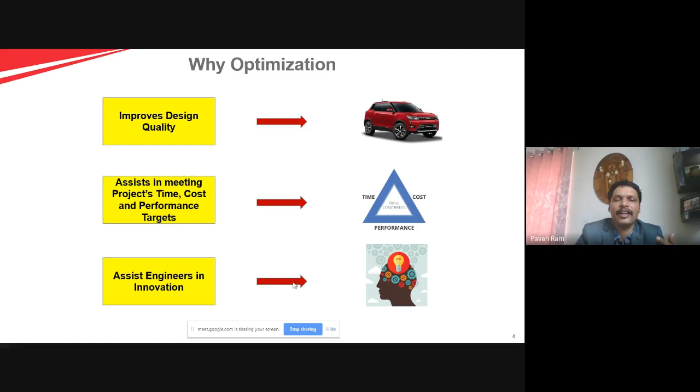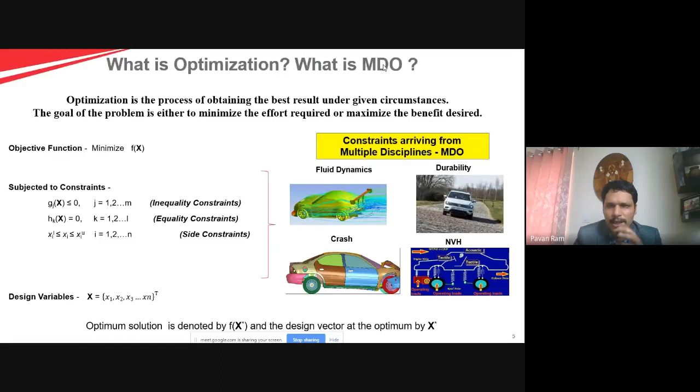They understand, they do some trade-offs, conflict resolution, and then they formulate the problem in a very systematic, mathematical way, so that your optimized mass is good for all the requirements. So MDO, because multiple disciplines are involved in the constraints. Okay. Now we know what the problem is, what MDO is and why MDO is required, right? Now let us look at it.

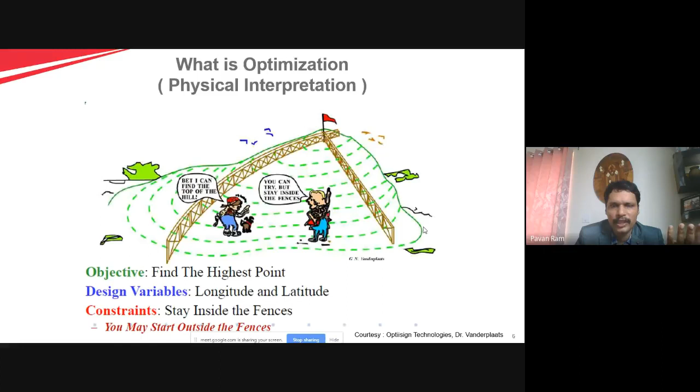Here the constraints are fences. So what I'm trying to say is, in an automotive engineering problem, these fences are nothing but the constraint equations coming from various requirements. So this is a simple physical interpretation. Now, let us give 2 minutes on the trade-offs an automotive engineer typically has to make.

can you see my cursor? All of you are able to see my cursor? Yes, sir. Great.

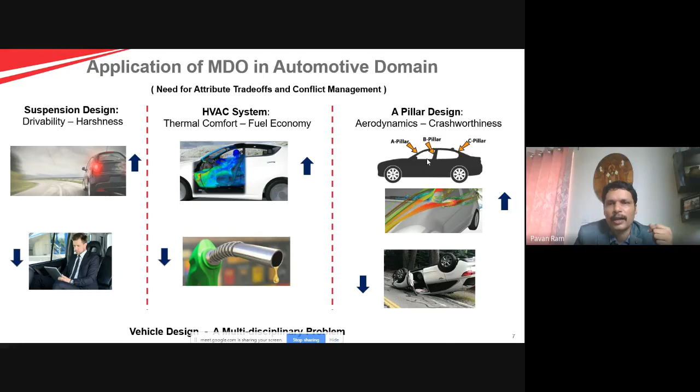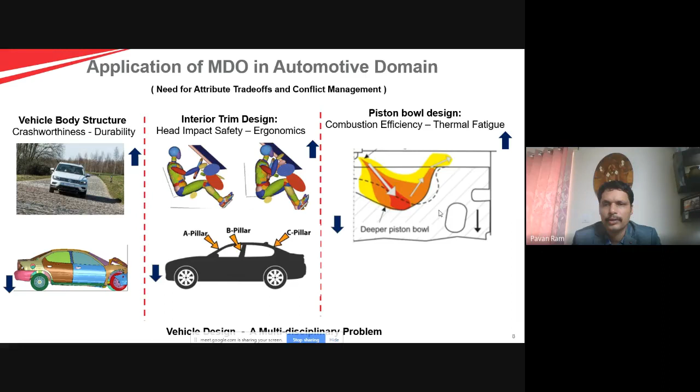Okay. So now we understood what is optimization, why optimization, and what are the typical trade-offs in automotive engineering. This list of trade-offs can go to more than 50, 60 in a typical automotive problem. What are the key challenges in applying MDO? First of all, how to formulate the problem. It requires people from multiple domains. And then how to run various codes, HyperMesh, ANSYS, LS-DYNA, because it requires expertise, and each code is good in one phenomenon. Abaqus is good in contact, LS-DYNA is good in crash, Adams is good in vehicle dynamics. So how do you get experts in different softwares to come together and start working on this?

And then let's say you have the experts, you have the problem definition in place. At the end, when the results come, how do you interpret the results and ensure that your manufacturing cost and scalability aspects are taken care of and your recommendations are going into the product? Different levels of expertise are required. And once you get this expertise in place, MDO should not be a challenge, right?

Of course, the benefits of MDO I already explained. Quickly, MDO can manage complex problems. It can handle multidisciplinary problems. And then we need to come up with a single solver which can do optimization, because there are a lot of solvers doing multiple things. Can we come up with a single solver which will help to deal with all the disciplines? And then there will be a drastic reduction in computational time and cost if you get into MDO mode.

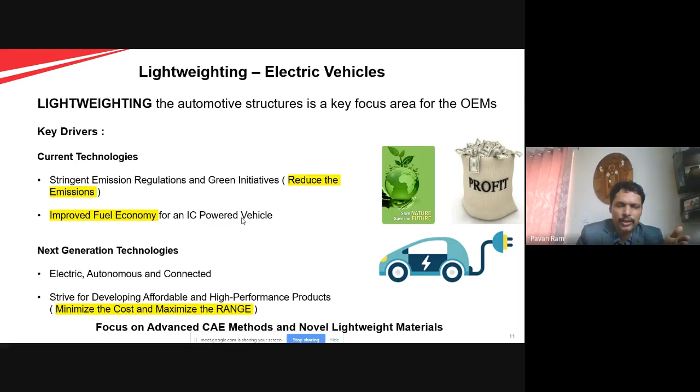So now let us get into some specifics of EV and IC engine powered vehicles. You all know why we are talking about EV. Obviously, if you reduce the weight of the structure, it will translate into either range improvement or fuel economy improvement. So I'll not stress on this slide. Okay. So now when you try to do lightweighting, there are various ways one can do lightweighting.

One can focus on the material, one can focus on the joining techniques, one can downsize the engine, improve the efficiency and downsize the engine so that your overall weight of the engine will come down and your vehicle performance will improve. Or you can work on structure, doing the structural optimization like wall thickness, shape change, topometric, size optimization, right? Multiple options are there. In this example, I'll be talking about gauge optimization, thickness optimization.

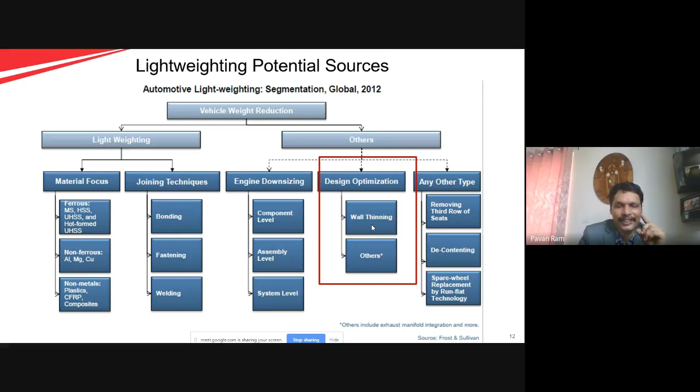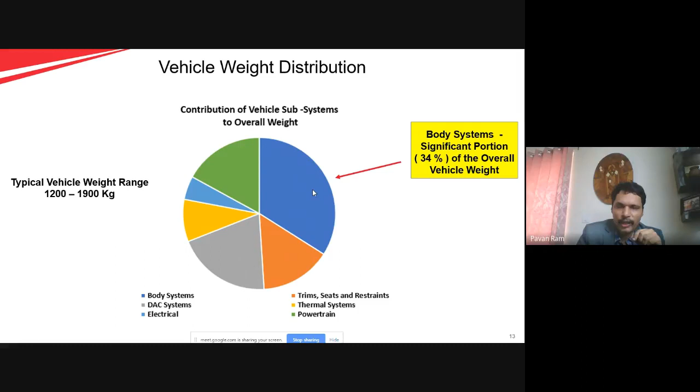Now coming to an overall vehicle, what is the low hanging fruit? So this is a typical distribution of weight, right? Trims, seats and restraints, this is the weight. If you see, the majority of the weight is coming from body systems. 34% is from BIW structure, either monocoque or body on frame. So present work deals with the body in white structure. So if you see the body in white structure, right?

Next 2-3 minutes, I'll try to explain how to formulate an optimization problem in a passenger car. Okay. Again, there is an objective function, there are thicknesses, right? And there are constraints. And these constraints are coming from NVH, durability, and crash. Right? I don't want to get into details.

I'm not sure whether we have time. Acha, anybody can tell how much time is left for me? Sir, till 12:45, sir. Okay, good.

So let me just get into the details. So in this particular example, I took 3 thicknesses as the design variables, right? Thickness of the bumper beam, left rail, and shotgun. In a real world problem, the number of thicknesses will be huge, 40-50 thicknesses, which we'll be seeing in my next use case presentation. Right? So in this case, there are 3 thicknesses. And in a real world problem, you can have more than 40-50 constraints coming from NVH, durability, crash, vehicle dynamics, ergonomics, and so forth, cost constraints. Here I am showing only 3 constraints for your understanding.

One constraint, natural frequency greater than 15 hertz, right? This may be an idle engine frequency. You don't want the structure to respond to an engine when you are in a traffic signal. When you are in idling condition, your idling RPM, the rotating imbalance should not excite your structure. So one can be that. Your damage fatigue life can be more than 1.2, right? There are structures like the engine mounting structures, the rails, where hot spots are there. So your fatigue life should be greater than 1.2.

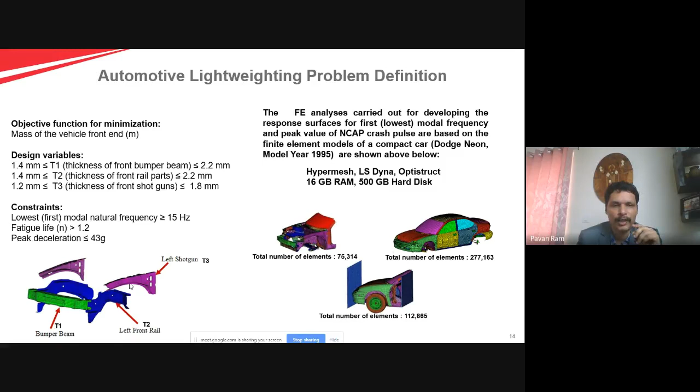Peak deceleration coming on the occupant should be less than 43 G. What it essentially means is that there are a lot of studies which say if your peak deceleration, chest deceleration, is less than 43 G, then your injury levels are less. These are some of the constraints. And if you see, there are 3 different models used for this. One is for NVH, one is for durability, and one is for crash. There are 3 different finite element models used. And your objective is to minimize the weight. Right.

Now, quickly, I'll go through 4 different approaches, how the MDO is evolving. Right? The first, the very basic approach is RSM-based method, where you generate the DOE, you generate the responses, you develop transfer functions, and use those transfer functions in an optimization problem and solve the optimization problem. That is the response surface method. The second one, which myself and Professor Anindya Deb from IISc have developed, a practical MDO, which results in a huge saving in terms of time to do the analysis, which I'll be explaining. And then there is something called hybrid MDO and then machine learning based MDO. Let us quickly see all these 4 methods.

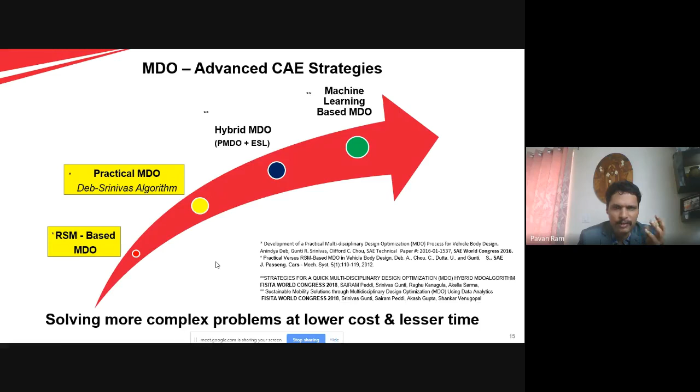So this is not your optimum solution of reduced weight, because you have a plane which is saying that your feasible region is only above this. So this will not be your optimum. There will be an optimum mathematically somewhere here, right? This is a typical response surface. And you can have an n-dimensional vector response surface. Here I am showing a three-dimensional one. It can be n-dimensional in the real world.

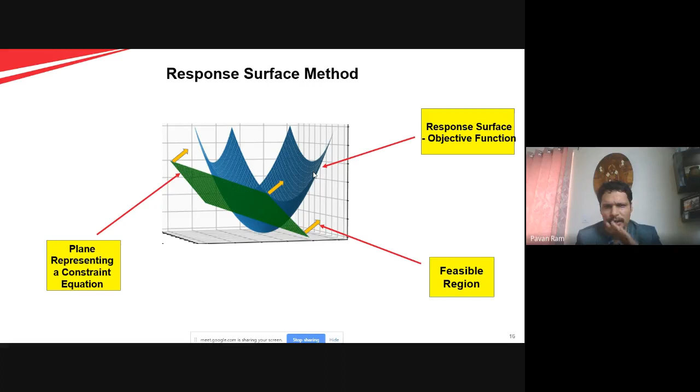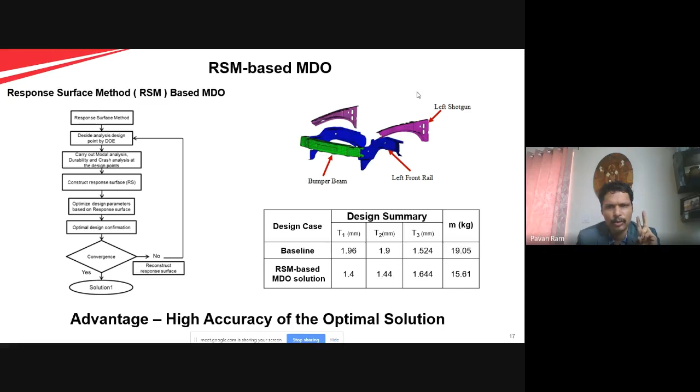Right? So what will be done in the RSM-based method? You have a DOE, you generate the responses, you build the transfer functions, and you plug that into your optimization problem, and then run the analysis, and you'll get a reduced mass solution. So here you got 15 kg, right? From 19 kg, you reduce it to 15 kg. Remember, this mass is only for these three components. In the real world, you will have many components.

Now, let me talk about the second one, practical MDO. So all of you now know RSM MDO. Now we are talking about a practical MDO. In practical MDO, what happens is you will try to reduce the number of runs which are required to do crash analysis. Why do you try to do that? When you're solving an MDO problem with durability, NVH, vehicle dynamics, and crash, NVH runs in a linear domain, so you will quickly get the result for whatever DOE you have set.

Durability, again, if you are within the yield limit, right, then again it's an elastic problem. Then again the time required is very less for solving durability verification plans. But crash involves material nonlinearity, geometric nonlinearity, right? And then contact nonlinearity. So when these three nonlinearities are there, and you're trying to solve at vehicle level, each run will take many days, right?

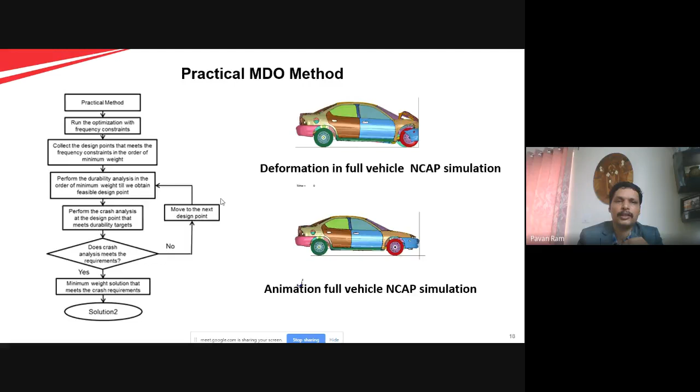So along with my professor Kalyanmoy Deb, what we thought is, why can't we design a method which will reduce the number of crash analyses, so that you get a substantial reduction in time, at the same time meeting the accuracy. So here you go. First, do NVH, apply NVH constraints, and chalk out those which meet NVH constraints in the order of minimum mass. Then you run the durability runs, and whichever meet the factor of safety requirements, you sort in order of minimum mass. Then you start doing crash analysis from the point where it meets both NVH and durability.

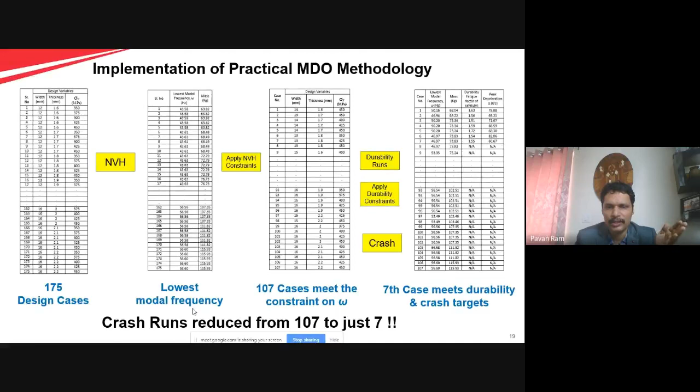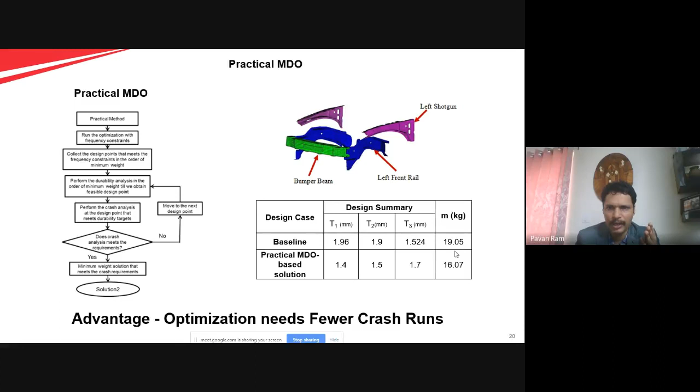So essentially, in this method, earlier you had to do 107 crash runs. Now you do only 7 crash runs, and you got the optimum solution. You got a reduction in mass in practical MDO, 19 kg to 16 kg, right? And if you see the time taken, the RSM-based method takes 62 hours to solve the problem, and practical MDO takes 14 hours.

Now, you can imagine, this method can be applied at vehicle level. What was applied here is vehicle level, but the design variables are only 3: shotgun, rail, and all. With the same method applied to the vehicle, we can include many design variables, and this time reduction will be constant. It's 1/4 computational time. Same accuracy at 1/4 of the computational time. So 4 days reduce to 1 day.

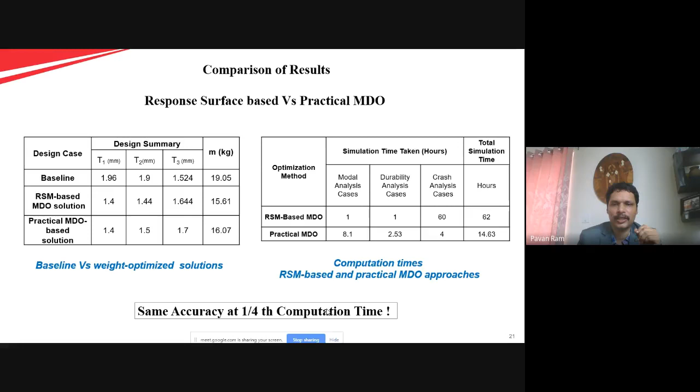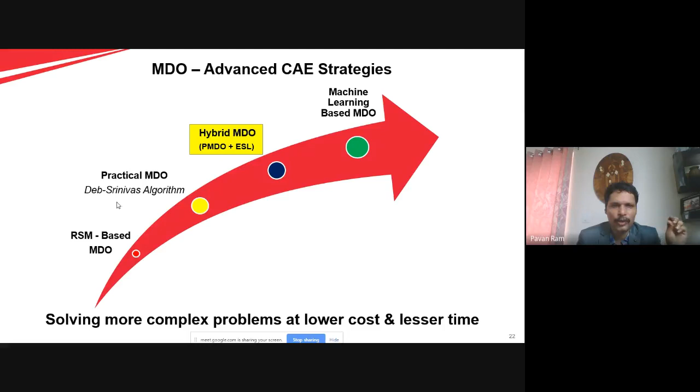Now quickly I'll go through the next method, hybrid MDO. Hybrid MDO is a combination of practical MDO and the equivalent static load method, where one of my students, Mr. Sairam Peddi, who is doing a PhD at IIT Madras, is driving this equivalent static load method in combination with what we have done in practical MDO. So in a hybrid MDO, even for the nonlinear crash runs, you can convert a nonlinear domain to a linear domain, do the optimization in the linear domain,

and then gain in the time required. I know it is very difficult for all of you to realize this in the short time; I cannot do justice to this method. You can pick up on this pointer and get into details when you get time. So hybrid MDO is a combination of practical MDO and the equivalent static load method. The equivalent static load method converts a nonlinear domain problem to a linear problem, does the optimization using the Genesis algorithm, and then maps back to your original problem. This gave a 1/8 computational time reduction. It's a huge benefit.

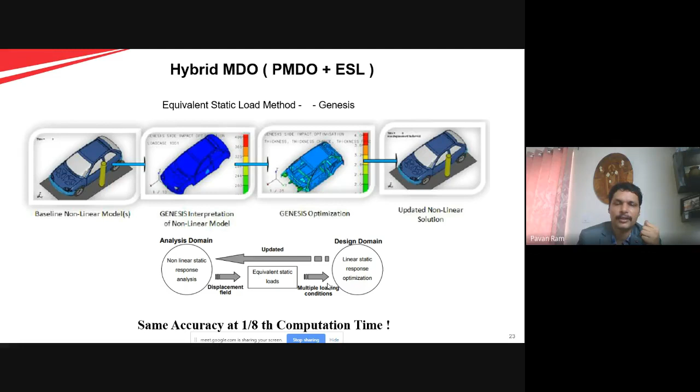And now what I'm talking about, a very important aspect, is machine learning based MDO. All of you will be surprised why AI, data science, and all these advanced machine learning based methods should be in the curriculum for automotive mechanical engineers, right? How is this relevant? You will realize after this example. So let me quickly go to machine learning based MDO.

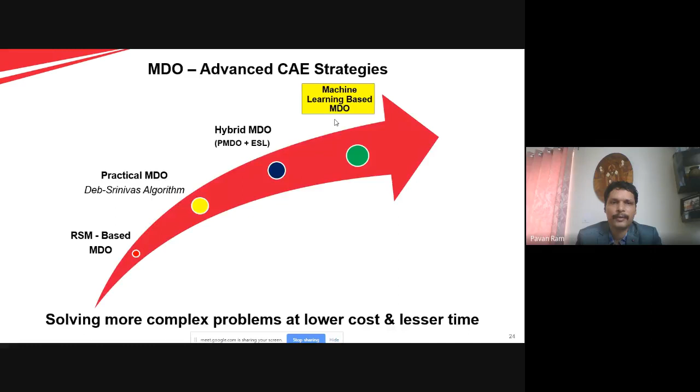Now I'll talk about an electric vehicle. Suppose you want to finalize a constraint for an electric vehicle, how do you do this? This will be interesting and relevant to electric vehicle platforms. I took two vehicles. One vehicle is IC engine powered, and on the same platform, the IC engine is replaced with the electric powertrain. So the structure is the same, with slight modification in the package to accommodate the powertrains. I prepared two vehicles.

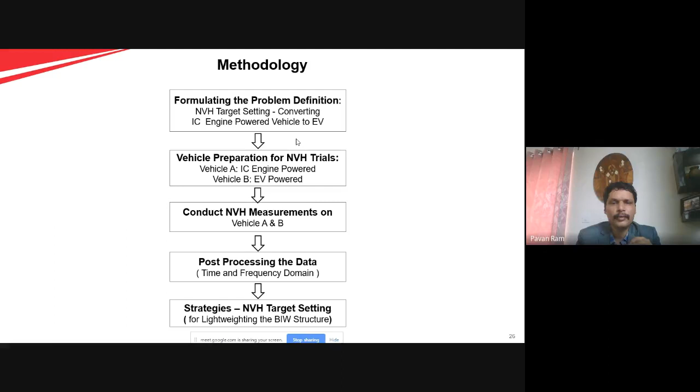So the two vehicles are instrumented and run at different speeds, 20, 30, 60, 80 kilometers per hour. Then a graph of noise versus frequency is taken. The green is the electric vehicle version, and in the histogram, blue is the IC engine powered. Obviously the noise levels are more in the IC engine powered one, and there is a significant reduction in the electric vehicle version. I'm talking about the gross noise.

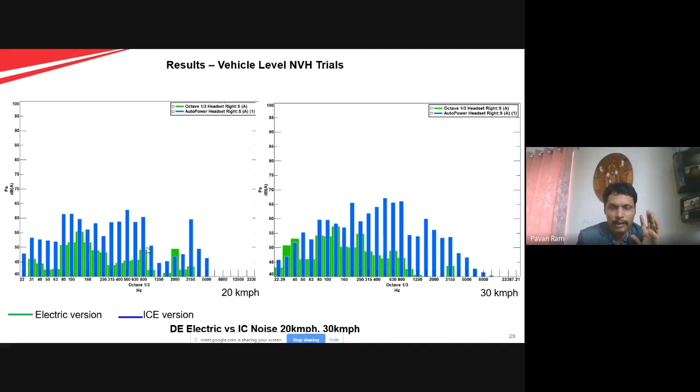We've done the experiments at different speeds, got the FFT, and we see resonances at motor switching frequency, controller switching frequency, and many resonance points within 0 to 500 hertz because of various excitations: motor excitations, rotating imbalance on the motor, cogging torque frequencies, multiple road excitations, and wind noise excitations. All these lead to the resonance modes.

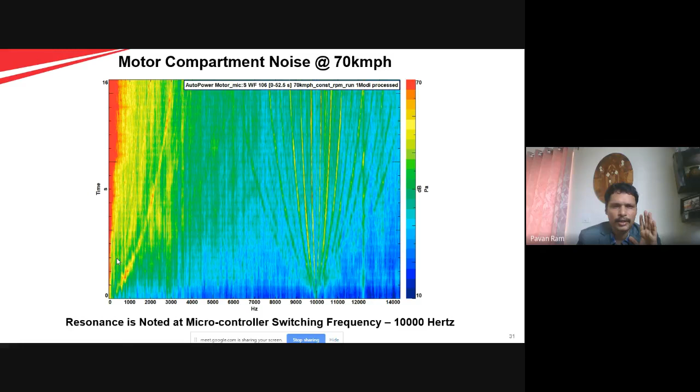So what I'm trying to say is, if you see the right hand side picture, since the noise levels are less in the electric vehicle version, can we increase the noise levels? Because the customer is okay with it, since the IC engine powered vehicle is selling with that kind of noise level. Why can't I increase the noise levels?

It essentially means, can I reduce the stiffness of the structure? Increasing the noise levels also means reducing the stiffness of the structure. And when you reduce the stiffness, the gauges can be modified, and it may result in a reduction in the overall mass. And this reduction in mass will help in improving the range.

Now, how much you should reduce stiffness? Those insights will come when you really do experiments on actual vehicles and come up with these kinds of plots and see what is the gap at different frequencies, and at this 80 hertz, which is that excitation, how much potential I have. Can I reduce the stiffness in this frequency zone? And this will result in the improved

mass optimization, right? And at higher frequencies, what is very important is we can't do it by structural changes. We have to do many other ways of masking the noises. You have to design sound packaging at higher frequencies. That's a different method altogether. It doesn't come from structural lightweighting at higher frequencies. But at lower frequencies, you have potential to work on stiffness of the structure fundamentally.

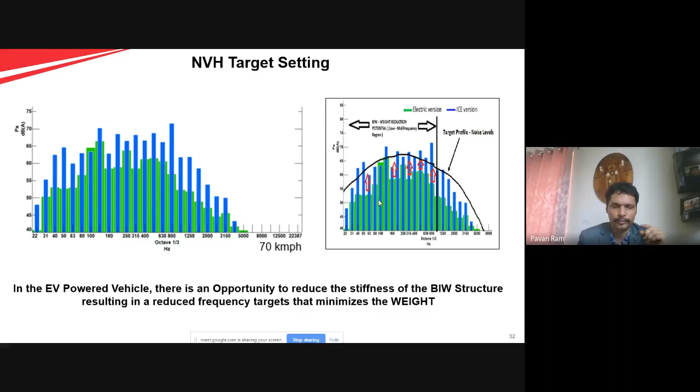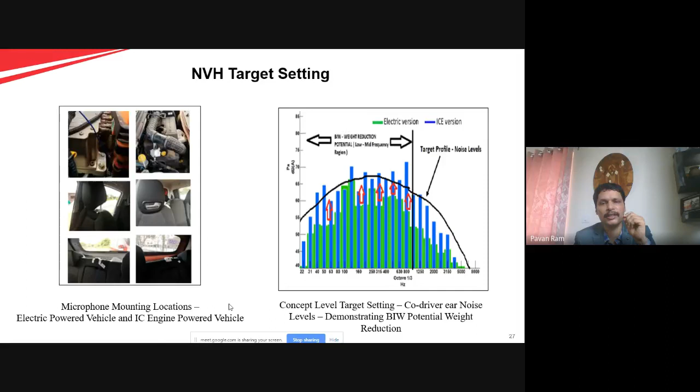Okay. Now, you saw the problem definition and you saw how one constraint is coming from experiments. Coming back to the slide, we ensured that this second constraint is coming from those experiments which were done on the real vehicles, right? Like that, you have to do many experiments and build many constraints. Now, you have a problem definition, you have done some experiments, you have finalized the constraints, and your design variables are the gauge thicknesses, right?

Now start doing the DOE, design of experiments. So around 200 data points, 48 thicknesses, and you got NVH responses, response 1, response 2, up to response 15. These are the modal frequencies at various locations of the components. These are NVH responses. The second table on the right hand side top is a crash response. You have 14 design variables and 9 responses. These responses are the intrusions at different locations.

Okay. So you have a new platform, you got the build, you have done the CAE, and you got these 200 data points. Can one develop machine learning based models for these responses? Once they are developed, they can be used when you are trying to come up with an improved design or scaling that platform. So when you are doing a new platform upgradation, these machine learning models can be used at the concept stage of the product development.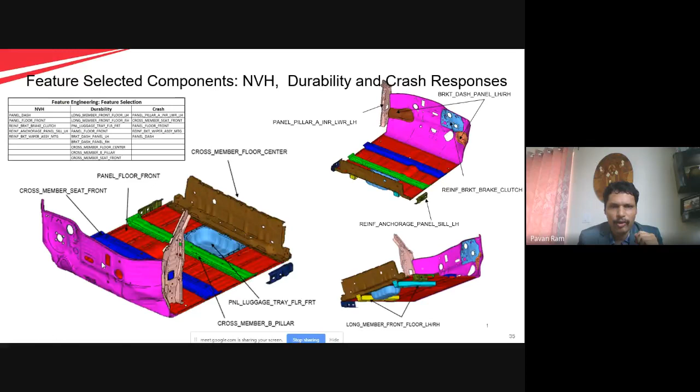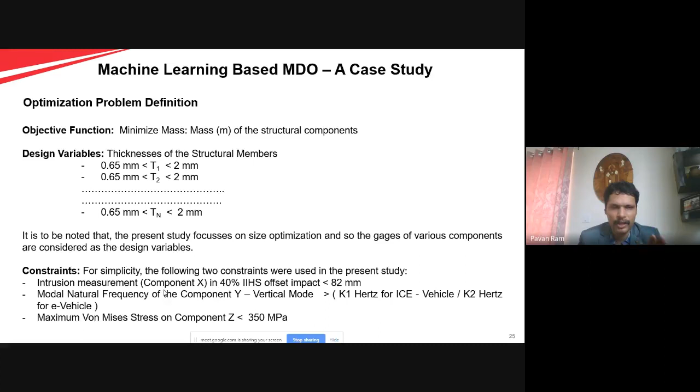Again, I'm going back to this slide. These are the 3 constraints, and the first constraint, intrusion, is that equation which I have shown you, coming from applying the machine learning models on the DOEs at 200 design points. So we have responses for all 3, NVH, crash, durability. We developed the machine learning models, and these are used in an optimization problem. You can apply any optimization algorithm, such as a gradient based one, and come up with the optimum thickness meeting all 3 constraints.

And all of you should understand one thing. What I'm trying to say is, dealing with NVH for EV is more complex than NVH for IC engine, because there are certain noises which are coming from tire, from wind, from wiring harness rattling inside the mountings, inside the clips, buzz, squeak, rattle, because of fit and finish issues. They will become dominant. Your hydraulic power steering, hydraulic flow, and intake.

So what happens is, these noises are masked in an IC engine vehicle, right? But now these noises will come up very significantly in an EV powered vehicle. So how do you deal with these noises? This is very critical. So NVH you have to deal with in a different way, because there is no engine which is masking these noises, and you have to take care of this. But what was shown here is a BIW structure, how the stiffness can be reduced, and how you can use machine learning models to reduce the weight of the structure, right?

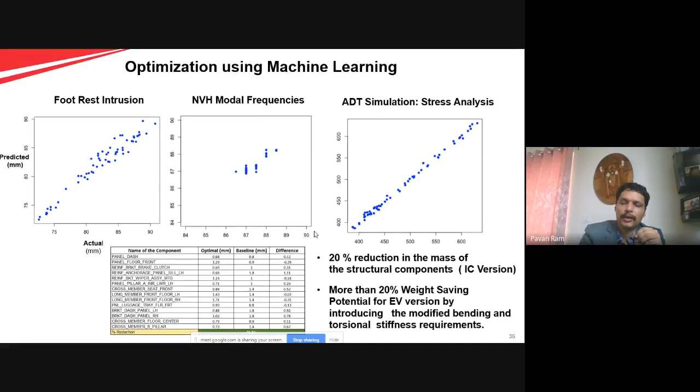And in the last one or two slides, I will mention the powerful ML based techniques which I recently used on one of our problems. I cannot do justice to this topic in the next 10 minutes, but one thing I can give you. You saw this slide previously. There are 200 data points and 14 design variables for crash analysis.

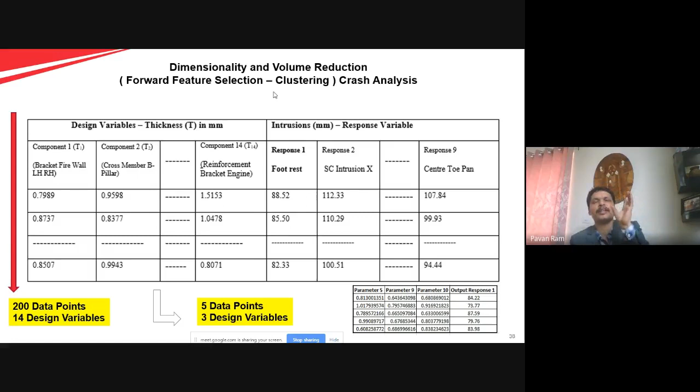When you apply forward feature selection and clustering, these are the machine learning based algorithms. Forward feature selection and clustering. When you use these algorithms, the number of data points will reduce to 5 data points, and design variables can reduce to 3 design variables, at the same time getting the same accuracy.

You can see here, the original DOE has 200 data points, and it took 133 days to run this analysis. And using dimensionality and volume reduction, you can just use 5 data points, and you can get the same accuracy. So the accuracy of this particular model with 5 runs and 3.3 days is 85%.

So I want to once again repeat this statement. We have the original data set. On the original data set, I applied forward feature selection and clustering algorithm. Clustering is applied on the rows, and because of this, the number of rows came down from 200 to 5. And the forward feature selection is applied on the columns, and 14 columns are reduced to 3 columns.

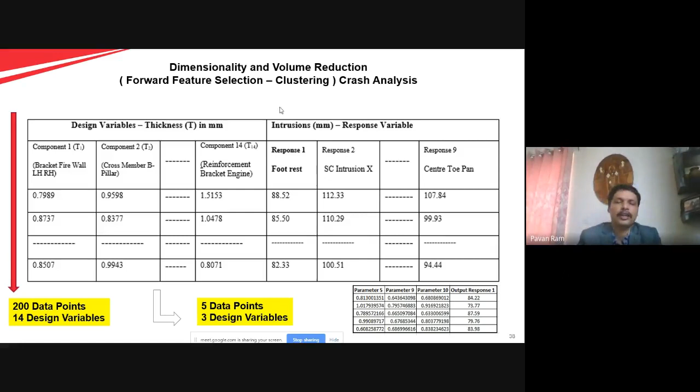What it essentially means is, whether somebody does the analysis using this big database or with this sheet of data, you will get the same prediction accuracy, more or less. But the time required to run this DOE is very less, because the number of runs required is very less. And especially this is very useful for analysis involving CFD, because CFD will take a lot of time. Crash will take a lot of time. For highly nonlinear analysis, you can use this technique of forward feature selection and clustering to reduce the original DOE. So this is one takeaway.

So what it essentially means is, an automotive or a mechanical engineer should deep dive into these advanced mathematical concepts, linear algebra, machine learning, AI, and then start applying them to solve their day-to-day problems, in terms of the products or processes you are designing. You should keep applying these things.

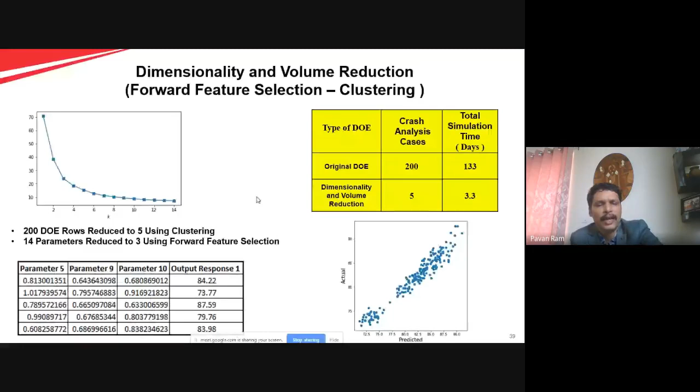So this is my last slide. If somebody wants to have a career in MDO, a beginner should have basics of mathematics, mechanics, strength of materials, finite element method, computer programming, basics of optimization. Most of these are covered in your curriculum. As a practitioner, let's say in the third year of your engineering, you can start working with a few engineers who are actually working on these problems in industry, and start gaining these skills.

Typically, a practitioner is someone who has some 3 years of experience in industry. He joined after BTech or MTech, and after 3 years of experience, he becomes a practitioner. And these are the skills. You should know CFD, vehicle dynamics, crash, NVH, and advanced finite element analysis. And an advanced practitioner should be in a position to use the emerging technologies, apply them, and try to come up with frugal methods.

And an expert, especially, what he should do is come up with various ways of MDO automation. How can you use Python and interface all these softwares together, right? LS-DYNA, Crash. Can I come up with my own product, an MDO product, right? That kind of thinking and that kind of vision an expert should have.

And you should use a lot of advanced concepts of innovation, right? And then biomimicry, and integrate with this MDO, and then solve the problems. And this MDO can be applied to many domains, right? Today I have shown you lightweighting, one aspect of this. It can be applied to aerospace, medical, biomedical, agriculture, and many others which I have not mentioned here.

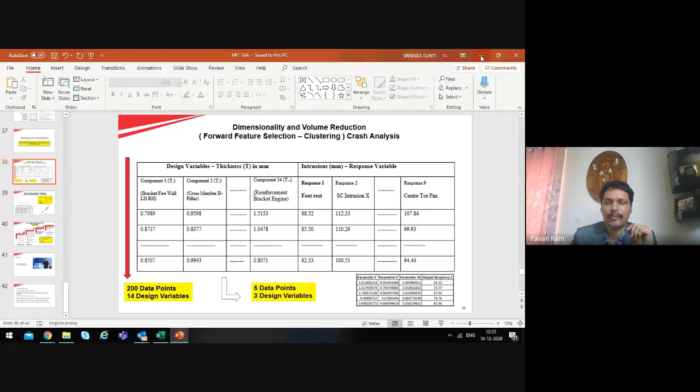And the second point, if you see my slide, can you see my screen? Yes, sir. Okay, so there is something called forward feature selection. You can note down. This will help you see, out of 14 design variables, how many design variables it picked? 3. And this is coming from that forward feature selection algorithm. So these are the 3 variables which are very critical for that response. So there are various mathematical algorithms which will help you go from 100 to 10 and 10 to 5.

Thank you, sir. Sir, one more query. It was really interesting regarding that learning map. As a student, what skill set should a student acquire in order to be an MDO specialist, from a student's perspective?

Okay, so first, you must have gone through rigorous mathematics in your first year, right? You should be very strong in mathematics, linear algebra. You should be very strong in mechanics if you are a mechanical engineer. And not only mechanics, this MDO is also applied to electrical and electronics, because there are EMI, EMC. So essentially, you should be good at your subjects, whichever subject you are taking.

And then start using some advanced tools which are available in the market, like various simulation tools to solve specific problems. Once you get into that, start building your own problems after discussing with practicing engineers working in various industries, then work on one internship project. Once you work on that internship project, you will get the confidence that you can add value to the practicing engineers or to the product. That is how you can pick one by one and start solving many problems in this space.